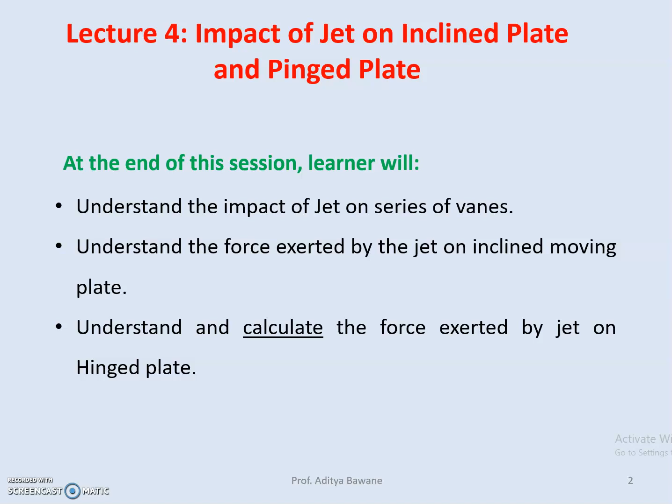In last lecture we studied the force impacting on the plate which are mounted on a wheel. Whenever jet strikes the plate, the second plate will come and take its place, so mass flow rate remains same for this area. So lengthening of jet is not occurring, and whenever lengthening of jet is not occurring, the mass flow rate is given as rho a v.

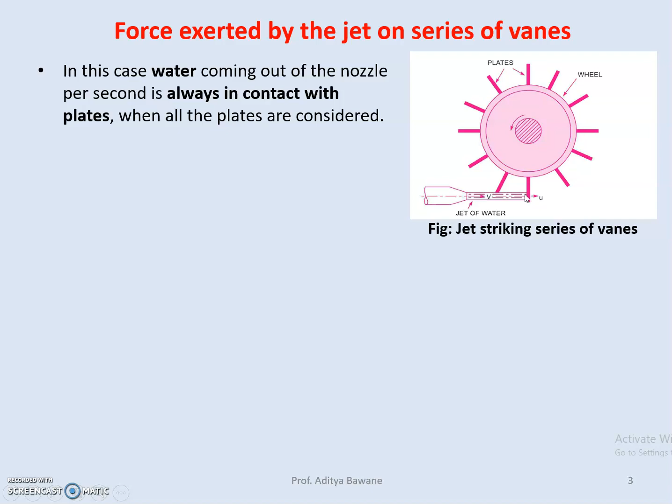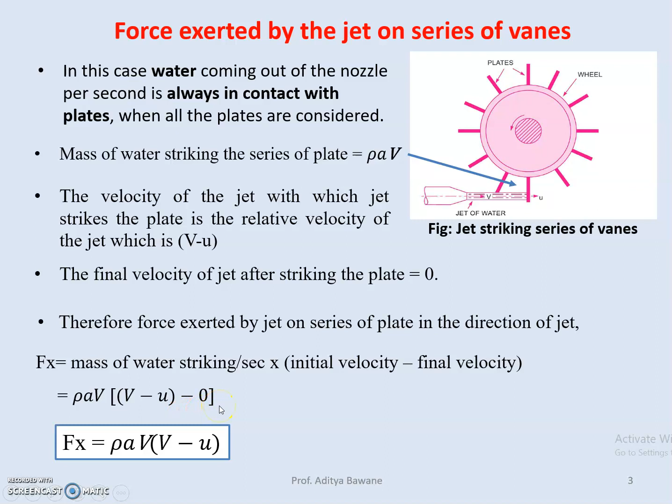So mass flow rate is rho a v, and initial velocity with which jet strikes will be relative velocity, as both are moving, so we consider it as v minus u. Final velocity when it strikes the plate, the momentum will be destroyed and final velocity becomes 0. So force along x direction can be calculated as mass flow rate into initial velocity minus final velocity, taken as rho a v, v minus u, final velocity 0. So Fx equal to rho a v in bracket v minus u.

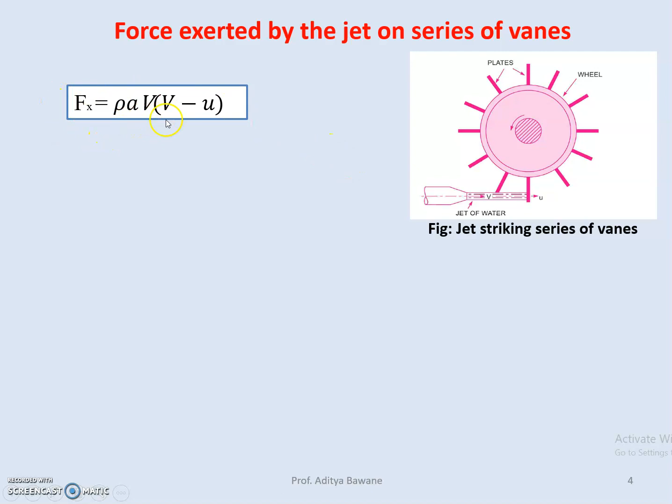Now we have calculated Fx equal to rho a v, v minus u. Now if you calculate the efficiency, efficiency is nothing but output by input. Output is work done, movement of shaft, and kinetic energy. Work done is calculated by force into displacement of that particular wheel, that is with the velocity u.

So Fx into u, and kinetic energy is always half m v square, so half m v square into v. That is nothing but mass flow rate, which is rho a v, so rho a v square into v, it becomes v cube.

Now if we substitute or differentiate this equation and equate with 0, we will get the condition for maximum efficiency. We will get v equal to twice of u, and if we substitute this in the equation, we get maximum efficiency as 50%. So for series of vanes, maximum efficiency will be 50%, it will not exceed more than that.

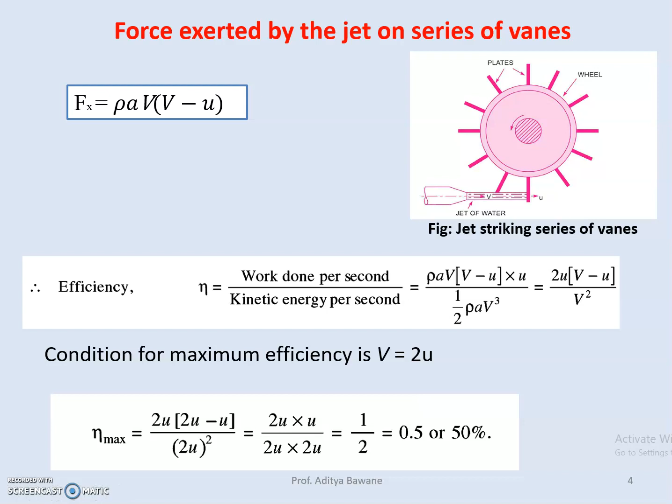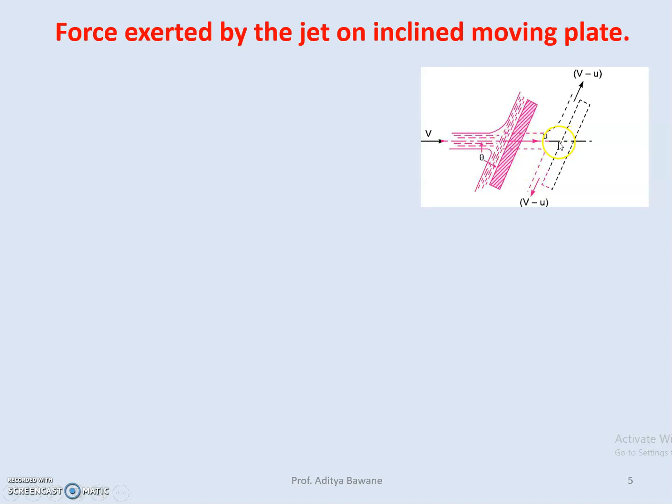Let us move to the next section, force exerted by jet on inclined moving plate. Now whenever the jet is striking on the plate which is inclined and moving with a particular velocity, in this case the lengthening of jet is occurring. So again we know mass flow rate will be rho a, v minus u.

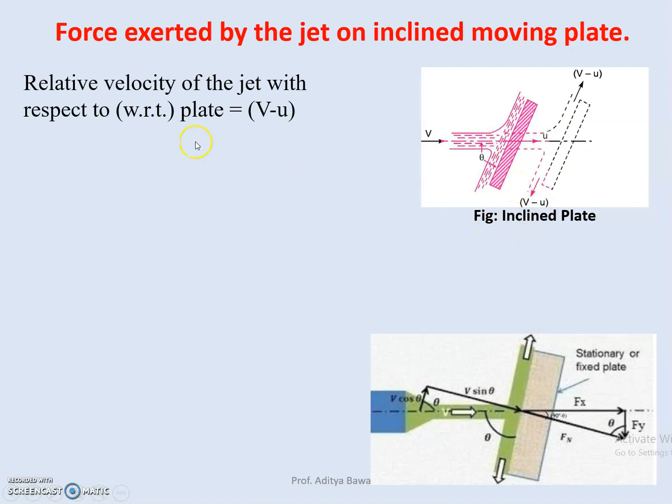For sake of understanding, I have considered this stationary image, this is moving, so inclined, stationary, and moving. So relative velocity will be v minus u, mass flow rate rho a, v minus u. Now in this case it is assumed that the friction between this fluid and plate is 0, so whatever velocity comes in will move with same velocity, inward and outward.

So force exerted by the jet in the normal direction to the plate will be given as normal force, acting on the plate perpendicular to the plate. So Fn equal to mass flow rate into initial velocity minus final velocity. Initial velocity in this case is v minus u sine theta. For fixed plate it is v sine theta, and for a moving plate it is v minus u sine theta, as relative velocity comes into picture here.

So Fn equal finally to rho a, v minus u, bracket square, into sine theta. This equation is important.

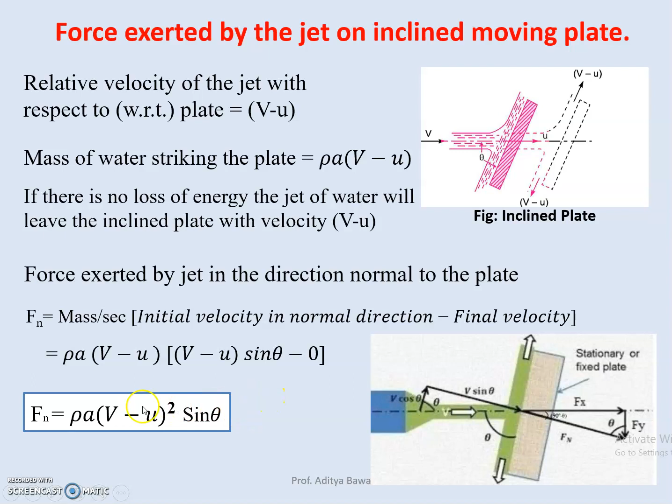Now this Fn can be resolved into two components, Fx and Fy. Fx is equal to Fn into cos of 90 minus theta. From right angle triangle geometry, this angle is 90 minus theta. So Fx equal finally to rho a, v minus u, square, into sine square theta, as sine theta into sine theta becomes sine square theta.

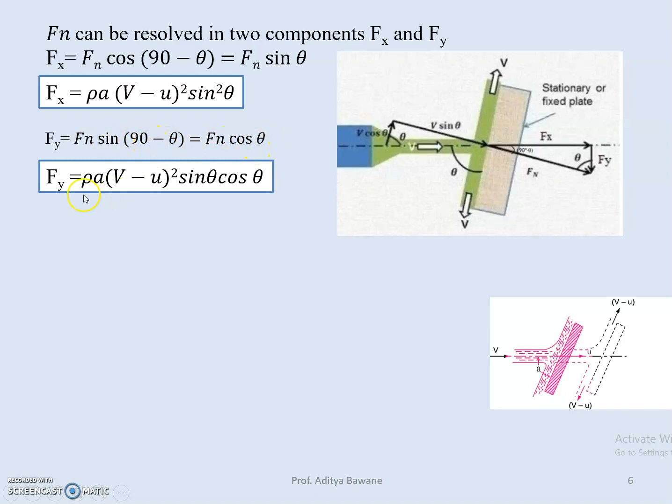Now Fy equal to Fn sine of 90 minus theta, which becomes cos theta. So Fy equal to rho a, v minus u, square, sine theta into cos theta.

Now work done will be Fx into distance traveled by the plate, so Fx into u. So work done is rho a, v minus u, bracket square, sine square theta, into u, in watt.

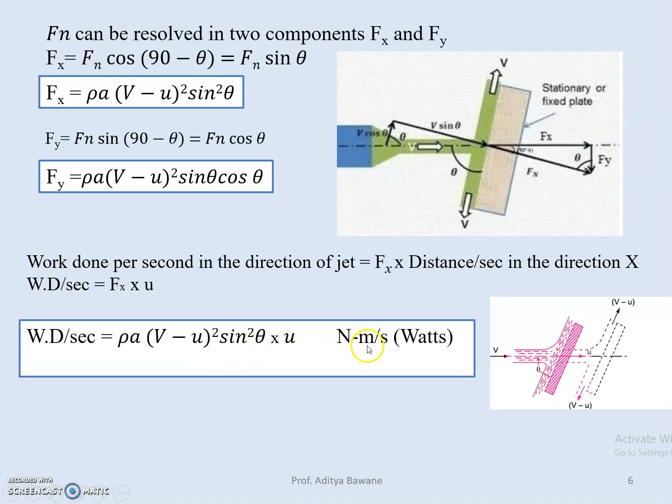Now next point, force exerted by the jet on hinged plate. Let us consider a vertical plate which is hinged at point O, and jet is exerting a force at its center. Let us consider that distance as x. Now with that force exerted by the jet, the plate will move with a particular angle.

Its center of gravity will move from this point to this point. This will be W, and the normal force which was acting along x direction is now along this direction. So at the equilibrium condition, at this point all the moment of forces will become zero, meaning whatever force is exerted by this normal force and this weight will become zero.

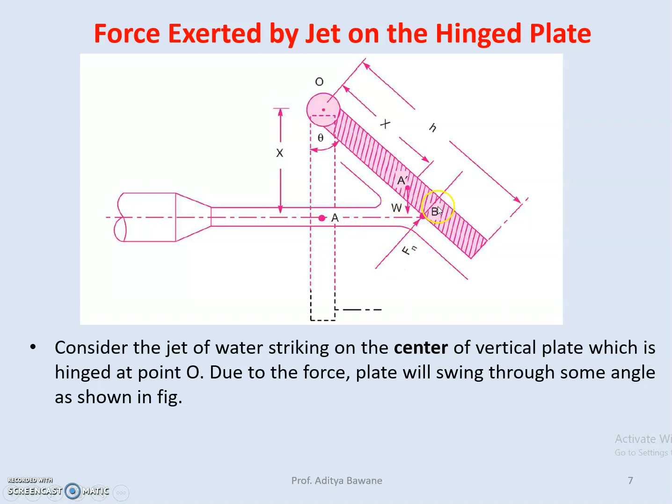Now let us consider this triangle. Whenever the plate is moved from this point to this point, if this angle is theta, this is a right angle triangle. This remaining angle is 90 minus theta by geometry, so this becomes 90 minus theta.

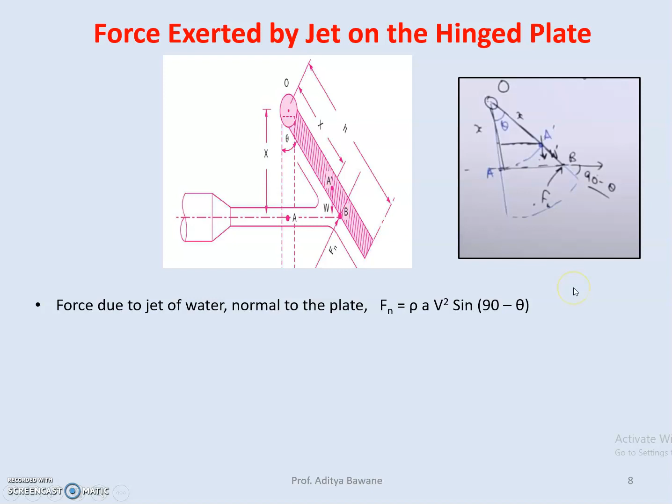So the force exerted by the jet of water normal to the plate, Fn, equals rho a v square sine of theta. In this case, theta is 90 minus theta. Now next, we need to calculate the weight of the plate.

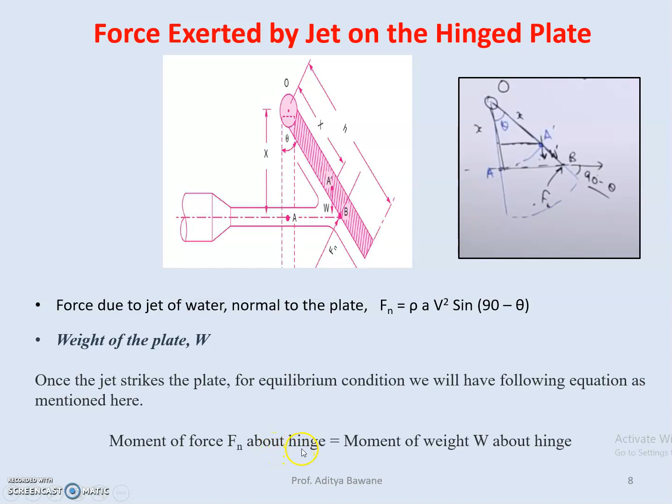Once the jet strikes the plate, for equilibrium condition we know the moment about point O will be zero. There are two forces, weight in downward direction and force in upward direction. These two forces will equal zero, so Fn into this distance and W into this distance equal zero. Thus moment of force Fn about the hinge equals moment of weight about the hinge.

Now take Fn into OB, this distance OB, and W acting downward into OA. So what is Fn? Rho a v square sine of 90 minus theta into OB equals W into OA dash. OA dash is nothing but x, and this gives sine theta. Sine of 90 minus theta is cos theta. So W into x sine theta.

Now how to calculate OB? Consider this triangle OAB, a right angle triangle. To calculate cos of theta or OB, cos theta equals adjacent side by hypotenuse, OA by OB. What we need is OB, so OB equals OA by cos theta.

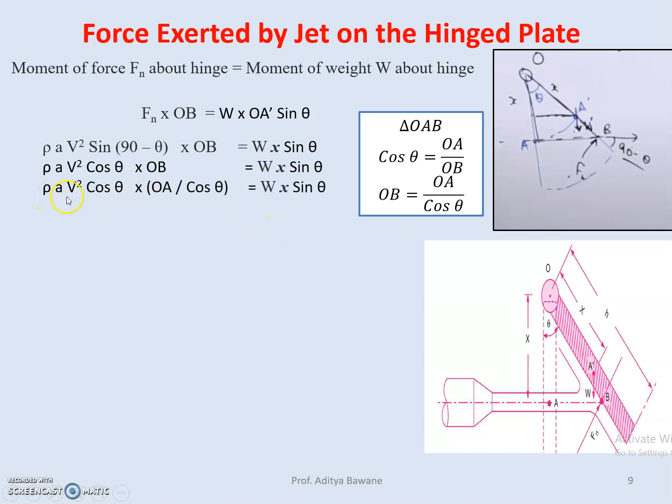So rho a v square cos theta into OA by cos theta equals W x sin theta. And OA is nothing but x, so the cos theta gets cancelled. For OA, I can say it is x, so it gets cancelled. The final equation becomes sin theta equals rho a v square by W, since x gets cancelled. This is the final equation.

This equation will provide the angle of swing when the jet strikes the vertical plate, which is fixed at a particular point.

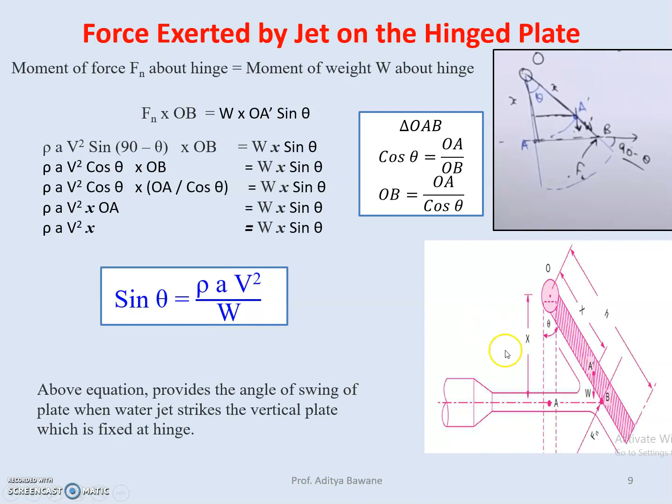Now let us understand one numerical. A jet of water, 30 mm diameter, strikes a hinged square plate at its center with a velocity of 20 meter per second. The plate is deflected through an angle of 20 degrees. Find the weight of the plate first, and second, if the plate is not allowed to swing, what will be the force required at the lower edge of the plate to keep it in vertical position.

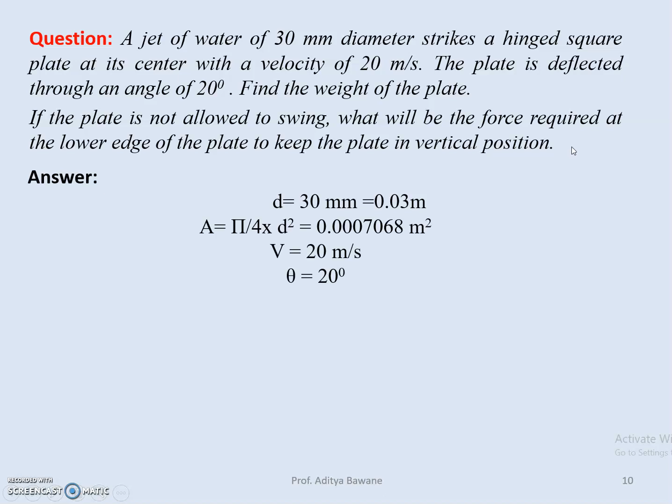Now let us understand what is given and what we need to calculate. First, they have given diameter of jet, velocity of jet as 20 meter per second, and angle as 20 degrees. We can easily find the area of the jet. Diameter is given, area equals pi by 4 into d square, so I get 0.0007068 meter square.

Now what we need to find, in the first case, is the weight, and in the second case, the force required to maintain the plate in vertical position. We know how to find the weight using the formula sin theta equals rho a v square by w. Now substitute this value in the equation to get w, or weight.

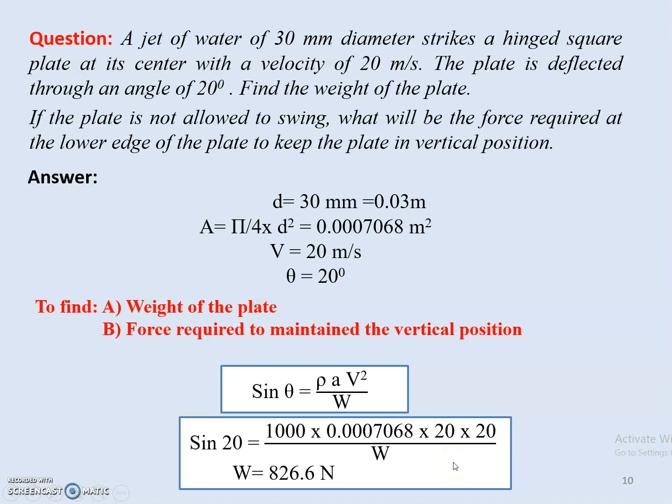So weight equals, substituting the values, sin of 20 equals density 1000, area as calculated, velocity 20 into 20, divided by w. So w equals 826.6 Newton.

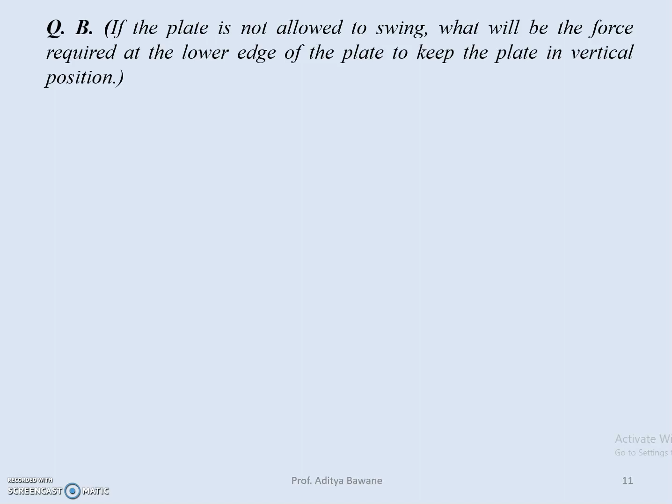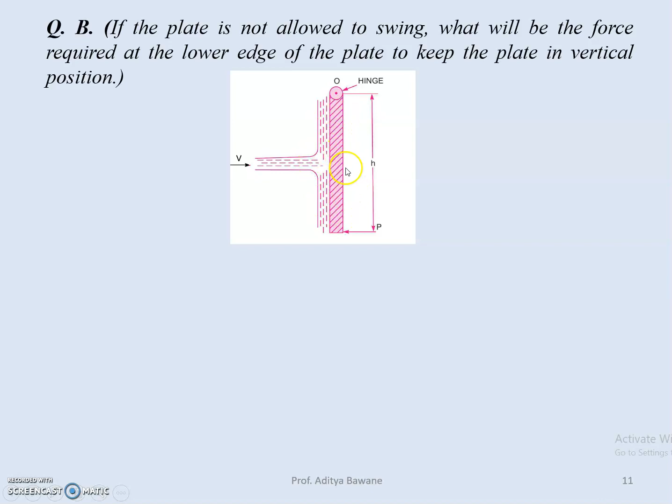Now second part: if the plate is not allowed to swing, what will be the force required to maintain that plate in vertical position? If I assume this force P acting at a particular distance, in opposite direction to that of the jet force, this will be balanced and the plate will not move at any angle.

So for that case, the jet is acting at the center, as already mentioned. So the jet force will be at h by 2, and force P at the lower edge will be at distance h of that plate. If I take the moment at point O, I get P into this distance, force P into total height of the plate h, equals force into h by 2.

So force into h by 2. If I calculate P, F into h divided by 2 into small h, the h gets cancelled, giving F by 2. So the force is nothing but rho a v square by 2 in this case. So I get the force required to maintain the plate in vertical position as 141.36 Newton.